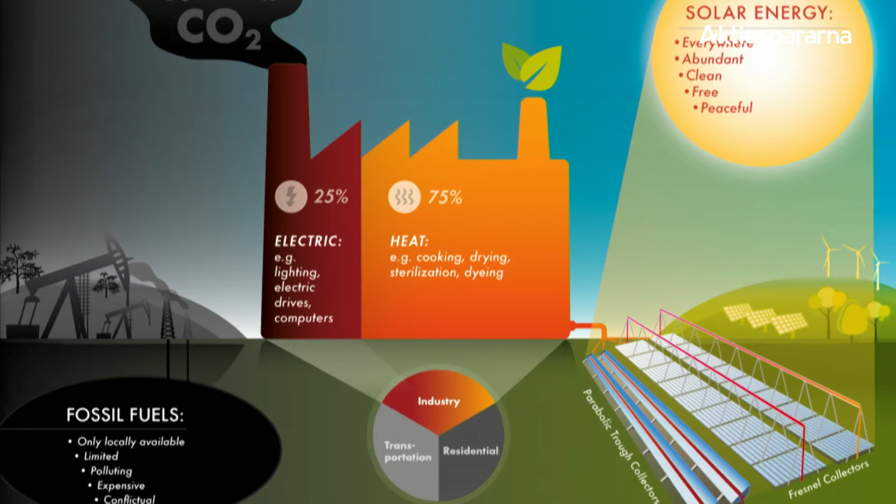Industry needs about 3 times as much thermal energy as electric energy. These are all the big boilers fired with gas, oil, or biomass, producing heat needed in processes like cooking, baking, all kinds of convenience food. Everything that comes in cans and glasses has been boiled before. For brewing beer you need heat, for baking bread you need heat, for making cheese you need heat, for making tires for cars you need heat. Heat is everywhere in industry, and heat is generated with fossil-fired boilers.

And there's a good possibility that a good share of this heat demand can be provided with solar technologies - this is what we're up to. Here you see two example technologies: one is from us, the linear Fresnel, and the other is a parabolic trough from our partner Absolicon, a Swedish company.

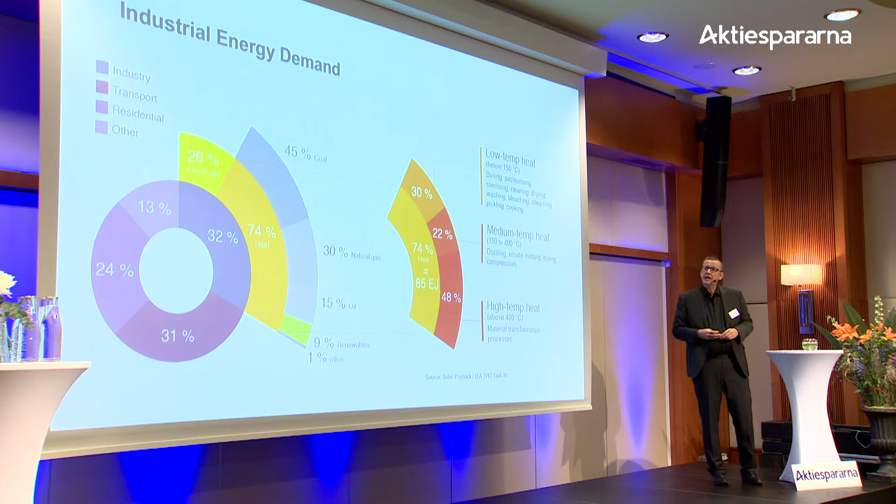This here is a more in-depth analysis of industrial energy demand. On the left-hand side you see the big picture, the global energy demand: 32% is industry, and 74% of this industrial energy demand is heat. Most of it is provided by burning coal, natural gas, oil, and a little bit of renewables.

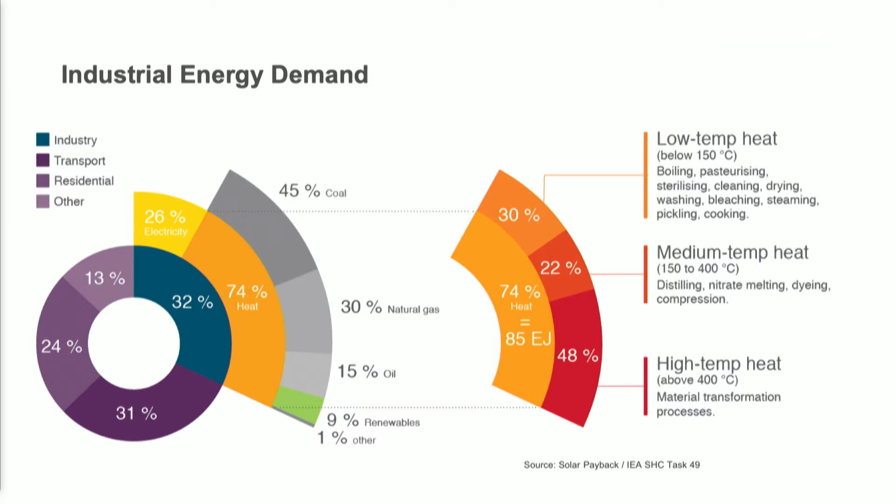Interesting on the right-hand side is the differentiation in terms of temperature. There's a good share, 30%, in a temperature range below 150 degrees C. The next one is 22% from 150 to 400 degrees. Then we have almost half at high temperatures for steel, glass, and other high temperature processes above 400 degrees C. With our technology portfolio, we are addressing those 52% up to 400 degrees C. The high temperature part is more difficult from a technical point of view - this will be handled with synthetic fuels, hydrogen, electric resistance heating and similar, or point-focusing solar technologies.

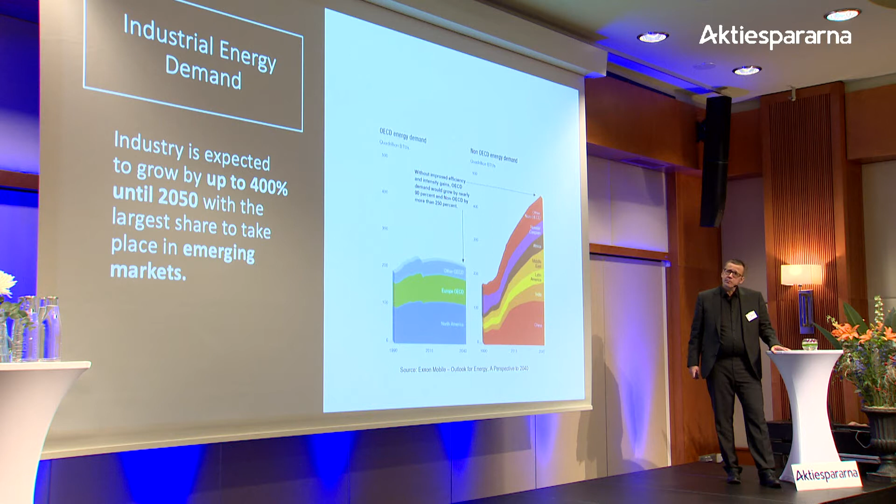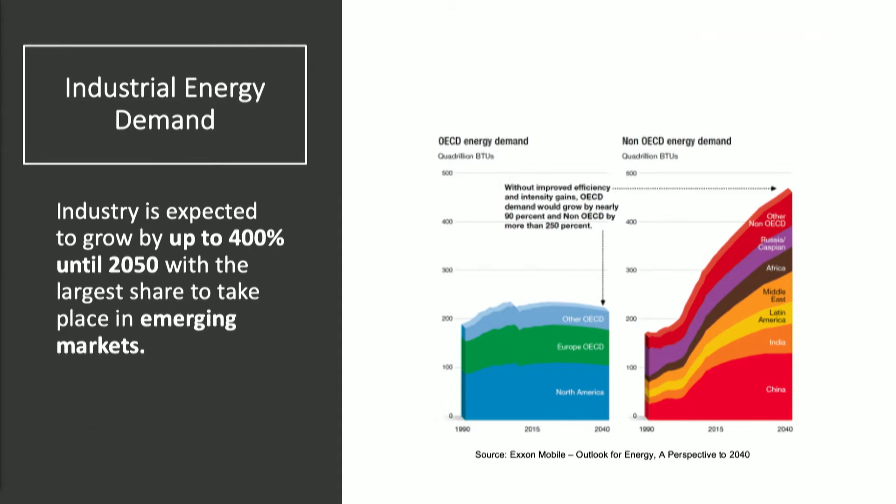Industrial growth is predicted to increase up to 400% until 2050, but it's not going to happen in Europe - not in Sweden, not in Germany, not in the OECD countries. It's going to happen in emerging markets like China, India, Latin America, Middle East, Africa. Most of these emerging markets are in sunny regions, and our solar technologies need solar radiation. The concentrating solar technology needs even direct solar radiation, meaning we need a blue sky, and this we find in those emerging markets. So it's a perfect match.

Another big advantage is we have the possibility to create a rather high local content. When you think of photovoltaics, it's produced nowadays mainly in factories in China - the PV modules are shipped on site, and then you need a few people to put those modules on racks. With our technology, we can create local value and educate people to help themselves, which is also very important from a political, strategic point of view.

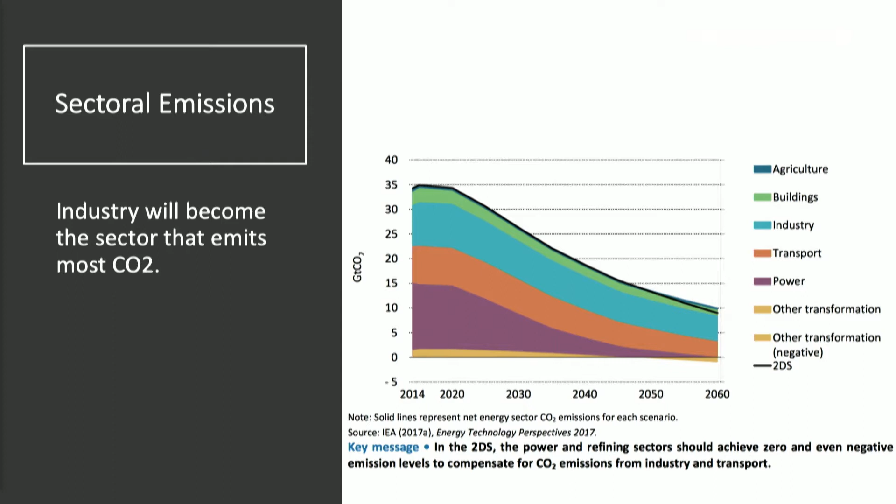And that's exactly our market. So how does it work? The Fresnel collector is like our flagship product. It's not the only product, but it's the one we are mostly known for and which is extremely interesting.

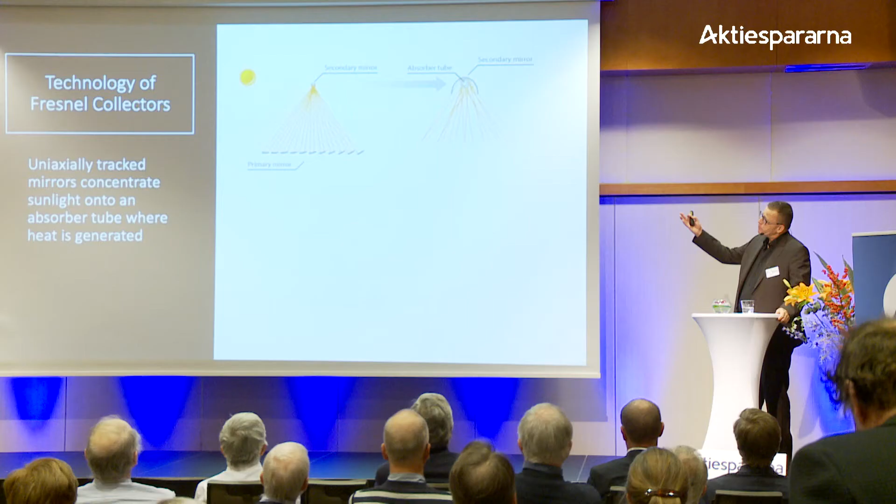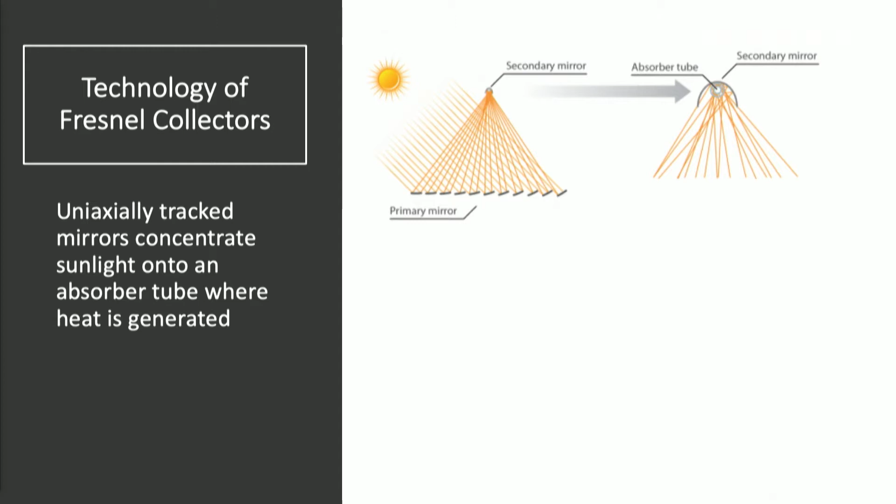It's an old principle, invented by a French physicist, Augustin Fresnel. Basically, the Fresnel collector is an approximation of an ideal parabolic trough. We have small primary mirrors, with a width of 0.5 meter in our case, tracked with little electric drives. They concentrate the light onto a vacuum receiver tube from CSP technology, in which heat transfer fluid is circulated. Typically we use water, either pressurized water or directly generated steam, but for higher temperatures we can also use thermal oil. With this technology, we can generate temperatures up to 400 degrees C.

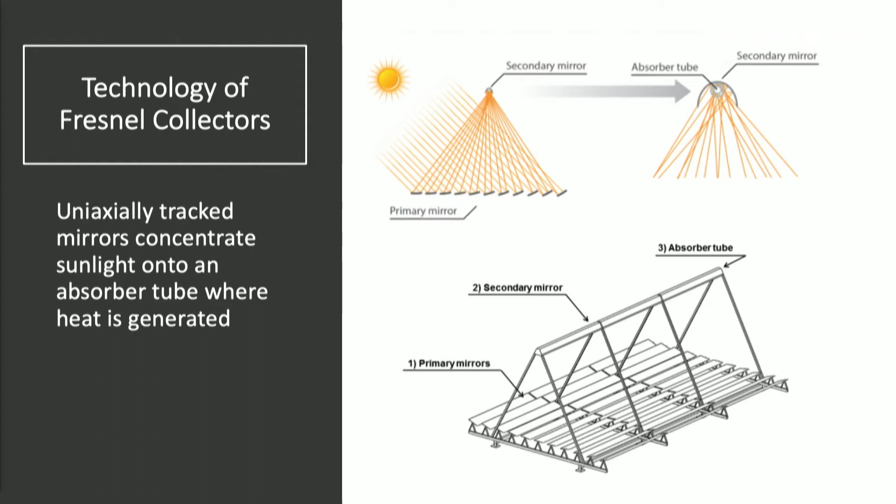From a technical point of view, we have developed a modular concept. We have modules with a length of about 4 meters. We connect those modules into strings with a total length of maximum 100 meters currently. For 1 megawatt, for example, we need 80 modules, which would be 4 strings with 20 modules each. Then we have 1 megawatt of thermal power.

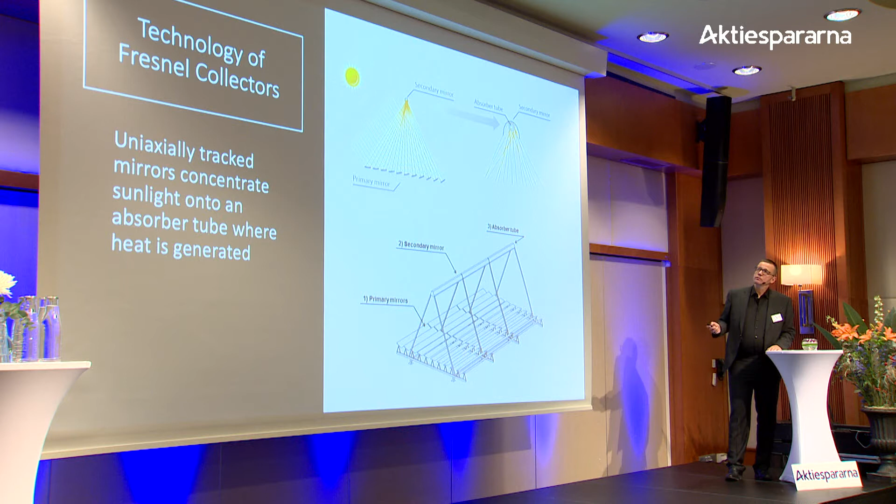How to integrate solar heat in industry? That's a very important question. Our Fresnel collector has a special advantage which turned into a very important sales argument when talking to customers. There are many companies out there that say, yes, I have this boiler sitting there, burning lots of fossil fuel. I want to replace it, or at least reduce my consumption of fossil fuels. How can I integrate solar heat in my process? When you work with regular flat plate collectors at lower temperatures, you have to tackle the production line of the company, but the company doesn't want you to touch their production line.

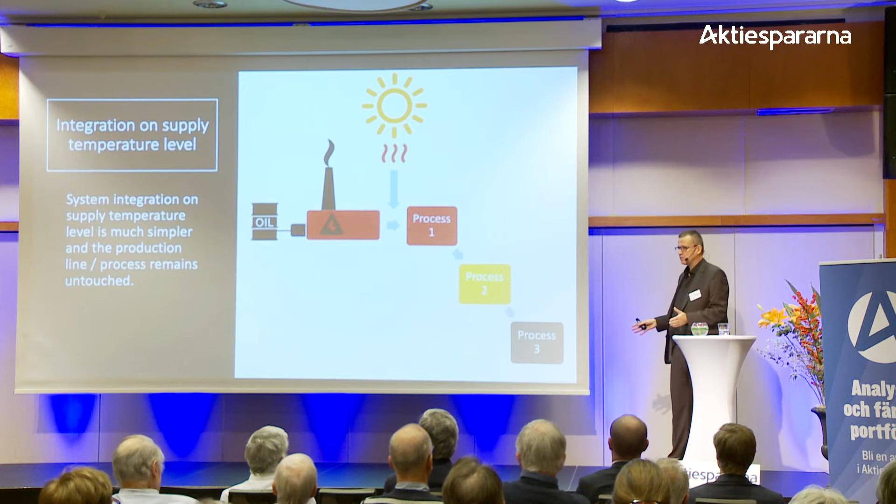That's their secret, that's their holy grail. So we have the advantage that we integrate our solar heat system on the supply level. We have the fossil-fired boiler providing heat for the production line, for example at 150, 180, 200 degrees C, and we connect at the boiler. We don't touch the production line, it stays a black box. That's very good when you want to convince a customer, because they never want you to touch their process.

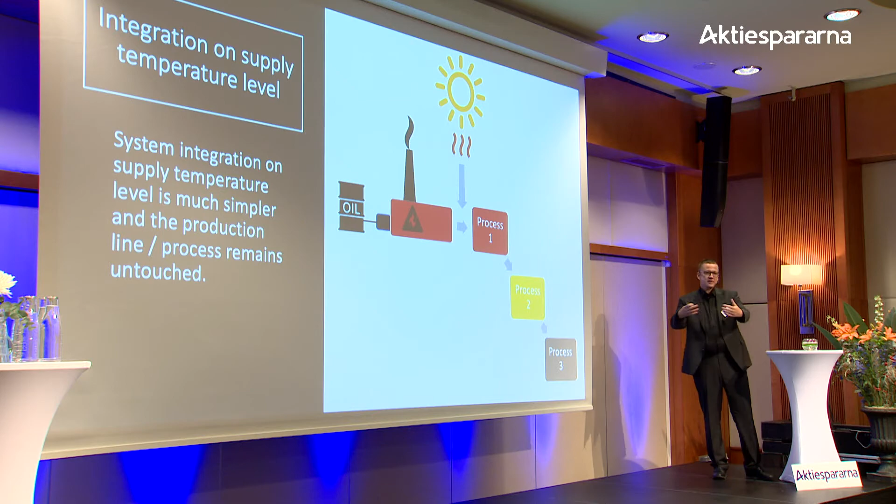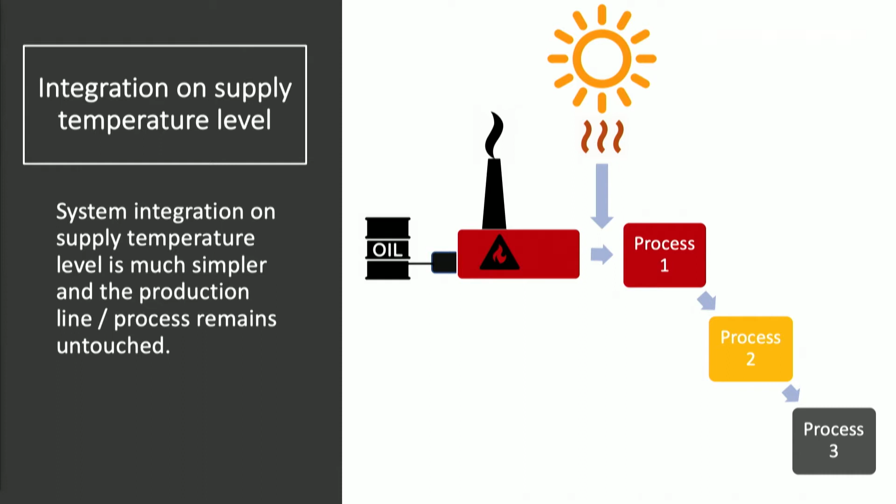That's another reason why we try to team up with boiler manufacturers. They already sell their products in industry, have the customer contact and market share, but they have an old technology—their core competence is burning fossil fuel. That was a good business model in the past, and now it's changing. I always say it's similar to producing exhaust tubes for cars: when cars are electric, nobody will need it. We have a similar situation now with boilers in industry; they have to be replaced over the next decades. We have the technology that helps boiler manufacturers adapt their business model to be more sustainable in the future.

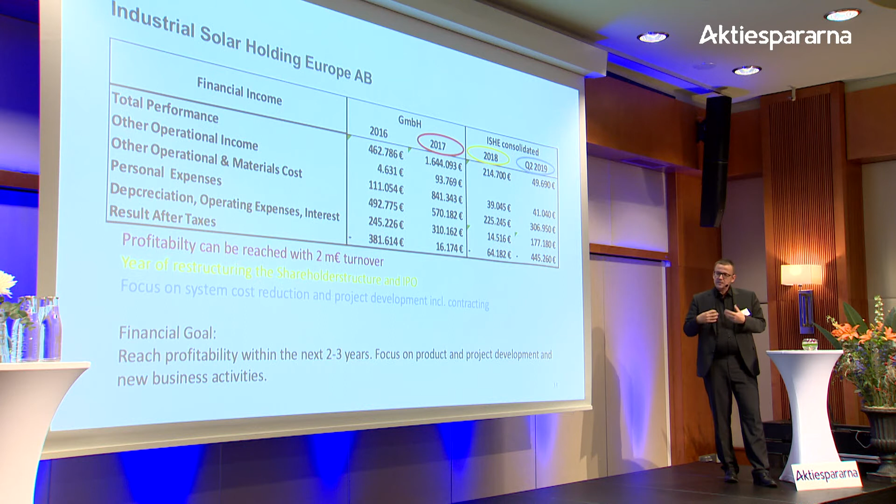So our goal is that we reach profitability within the next 2-3 years, and we are focusing very strongly on product and project development. The problem is that we are currently not yet a must-have for industry. Fossil fuel is cheap, carbon emissions are also cheap. So we are turning a very big wheel, but all the governments are having more and more policies to force the usage of renewable energy in industry, and this is helping us.

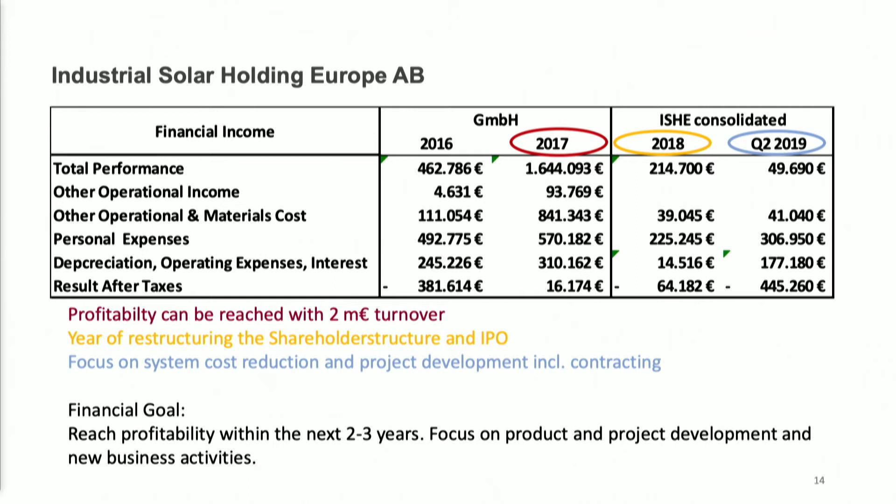Over the last years, we have built up a huge sales pipeline with a total volume of about 3,000 megawatts. This is almost a surreal number, but it also shows the potential of this technology, and it also shows that we have to overcome the market hurdle, or the entry hurdle, because we are not yet a must-have. So all the companies are interested in our solutions. A couple of weeks back, we got calls from the 3 biggest companies in the food sector, in automotive tires, and also tobacco. They called us within 10 days and asked for information, but they're waiting for the perfect time to realize those projects. So our typical lead times are between 1 and 2 years. With some potential customers, we are talking longer.

Some words about the share. Our current share price is around 9 kroner. When the share was initially traded, it was about 5 kroner. If you think of our experience, our track record, our sales pipeline and the market potential, it's a very moderate evaluation. Concerning the board, it's worth mentioning that Joakim Byström, the CEO of Absolicon, is the chairman of the board of Industrial Solar.

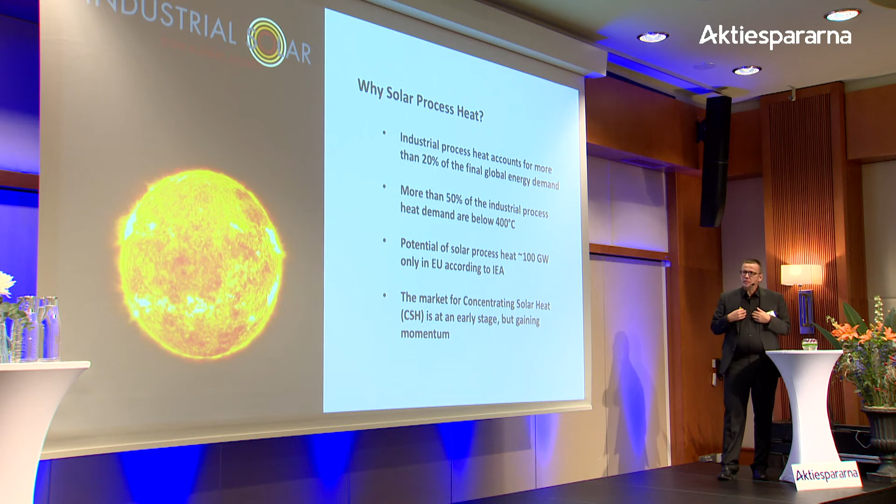So, why solar process heat? Industry is responsible for about 20% of the global energy demand. About half of the industrial process heat demand is below 400 degrees C. This is the range that we can supply. The potential is huge, the International Energy Agency calculated something like 100 gigawatts just in the European Union. And the market for these technologies is still at an early stage, but we feel a growing dynamic, because the discussion on climate change has arrived at the center of society.

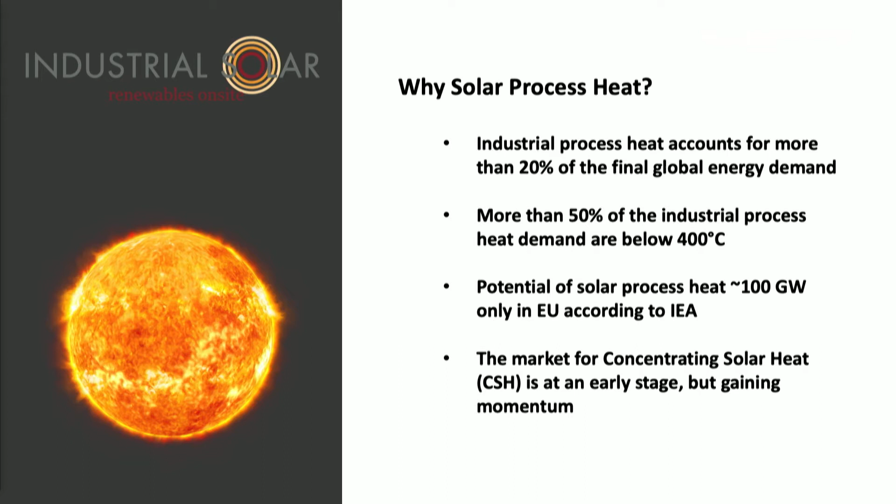We can claim that we are world leaders. There is no other company out there who has made more projects in industry with this technology. We are coming from the most known research institute in Germany, and we have been working on that technology for almost 20 years.

It's a unique technology, it's innovative, and has very important competitive advantages. We need less ground area. For 1 megawatt, we need about 3,000 square meters. If you calculate this with other technologies, you need much more.

We can go on rooftops. With other technologies, it's not so easy to go on rooftops. With parabolic troughs, for example, which are the main competing technologies, it's much more difficult because of the wind load.

We have easy, simple maintenance. We don't need much water to clean, and we can easily integrate on supply level. We have a premium product with high quality components made of stainless steel, aluminum, and glass, targeting a lifetime of about 25 years.

We have built up a network of partners, including market leaders in several industries. We have a very good sales pipeline. We are very strong in R&D, with several R&D projects going on, public funded projects, and a very experienced team.